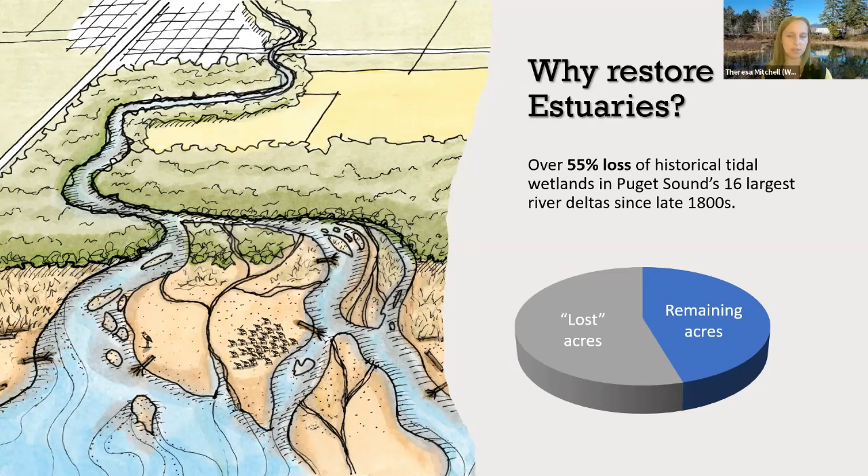And what habitat do they provide? Well, these places where saltwater and freshwater meet provide habitat for fish, birds, shellfish, and wildlife. They contain a lot of important nutrients that support those fish and wildlife and the food web in general. They're a great place for naturally filtering out water pollutants to increase water quality.

And they actually provide a good benefit for extreme events such as those king tides that we see, and also some resiliency to climate change. The vegetation that grows in these estuaries does that naturally for us.

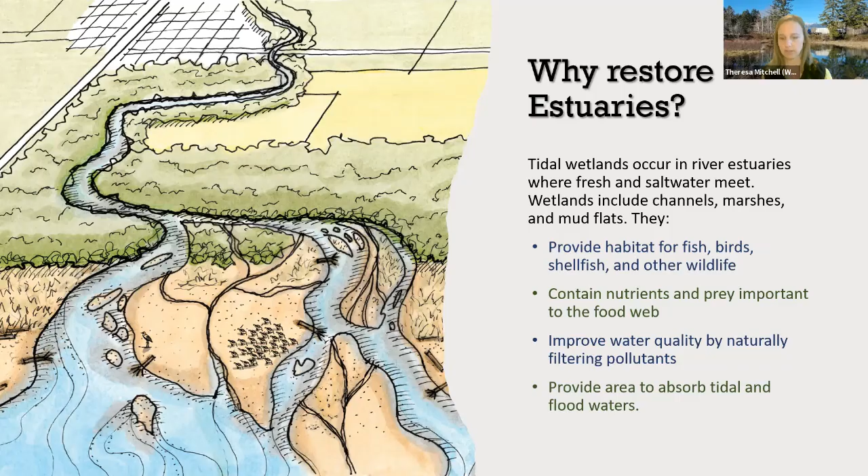So when I look at the Duckabush Estuary, and I apologize, I assume that you all know where it is, but I should probably step back and just say we're on the west side of Hood Canal, part way up, just south of Brinnon. So if that helps you all, apologies for not putting that in.

When I look at the Duckabush Estuary, I see opportunity for improvement. This isn't a Puyallup estuary. This isn't a Duwamish estuary. This is the Duckabush, and it's not used by other land use needs like agriculture or a port or something like that. It really is pretty much in its original condition, with the exception of the highway that has been built across the estuary.

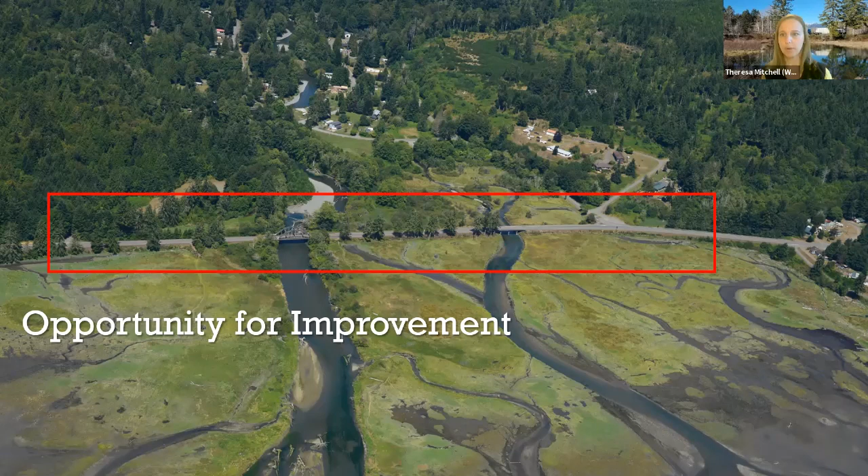So I've highlighted that here in red in case you couldn't see it. That's US 101, and it has 2 openings across the estuary to allow the river to come out. The project would address the highway and other features associated with the highway that have disconnected the river channels and altered the water and sediment movement within the estuary, that therefore has changed the way the habitat has developed here.

And I've put some yellow circles to show we've got some bridges that are locking the river in place. We've also got several places indicated by the blue lines that show where channels have been completely disconnected by the installation of the highway. So that water and sediment is no longer flowing through the highway in those locations, or they've been put into culverts so small that they've significantly altered the way that water and sediment can move through the estuary.

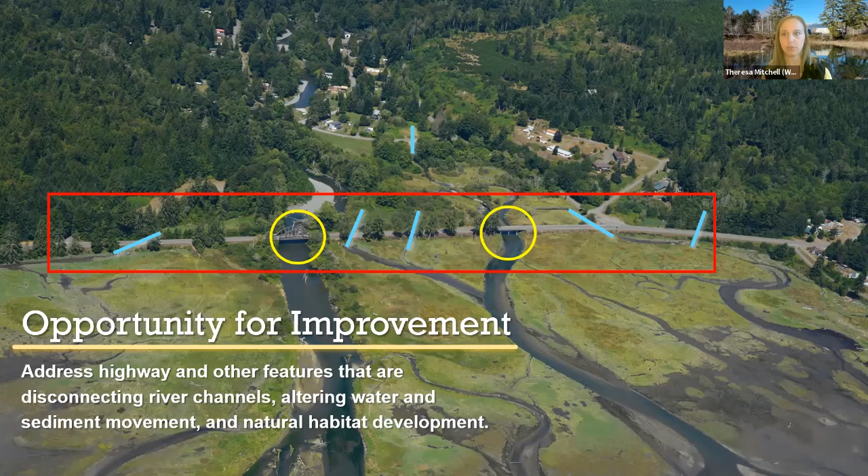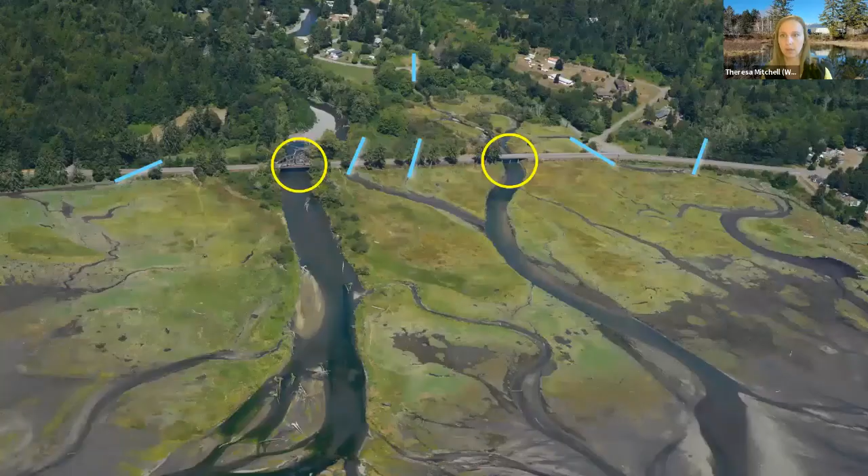We also have some plans from the Department of Highways circa 1931 when they were about to install what is the current US 101 alignment. So the US 101 alignment is this line here. The old road that we can see in the historical photo is this alignment back here. And this gives a very detailed understanding of what the channels and the connectivity used to look like in the estuary before all of the fill and US 101 was installed.

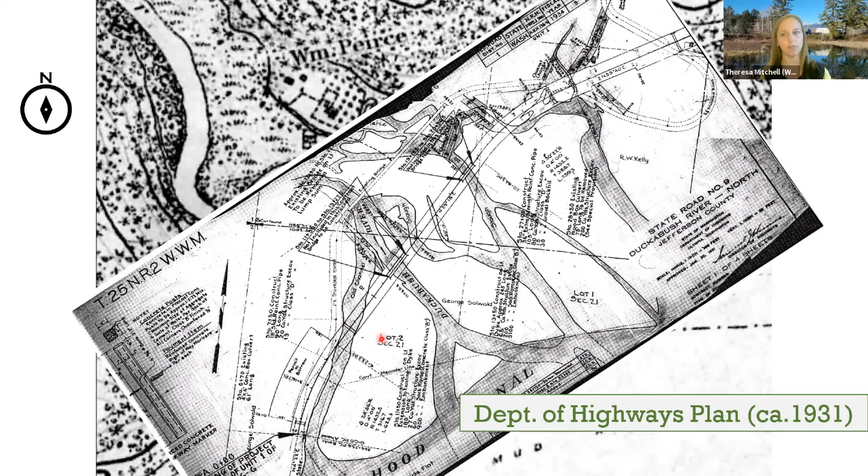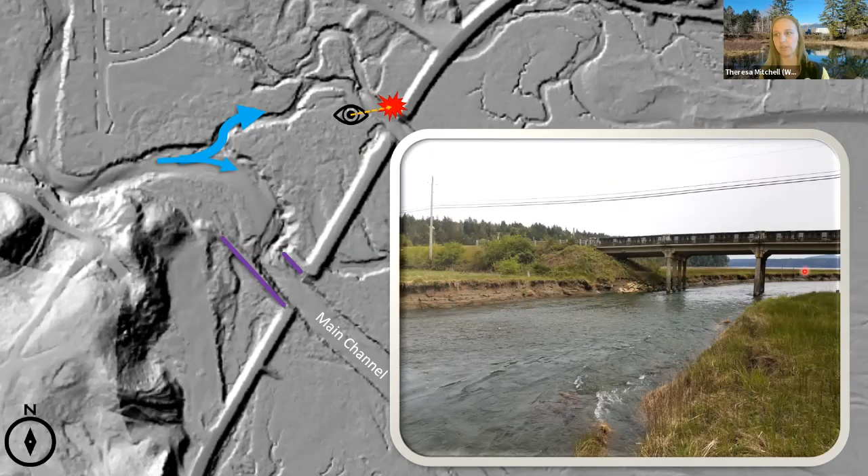As we've analyzed this site over the last several years, we've noticed a few things. The first is that the North Channel is actually taking on more of the flow than the South Channel. And so I think you can very quickly see where this is going, is that with increased flow and under higher velocities, we're seeing that north bank of the North Channel starting to erode more. And this is that sackcrete protection underneath the flat bridge. It's slumping in. You can see active erosion occurring on this bank of the North Channel.

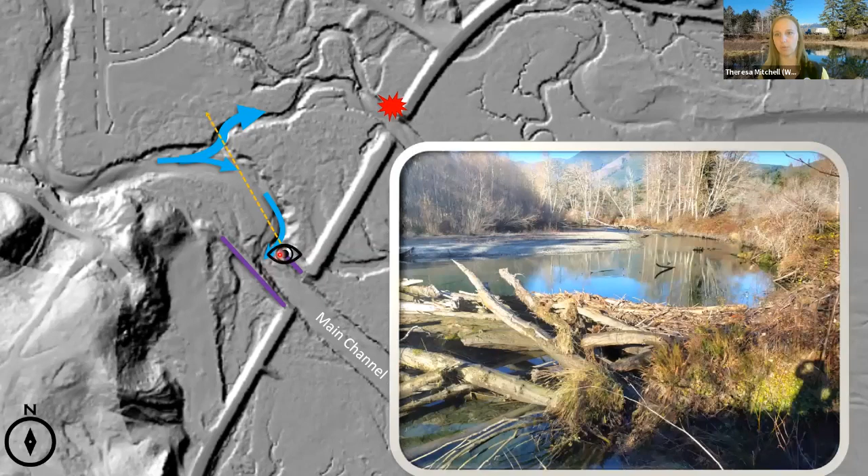Another thing we've noticed is that as the river is coming along here, it's taking a hard turn. It's hitting the end of this training berm, and it's having to take a turn, and it's pointing it into the other training berm. So if we take a look at some pictures, this is me standing on the end of that north berm, just looking up where the orange line goes, and you can see the river is actually off to the right. It's on the other side of the berm where we maybe don't want it to go in the long term. And then from the same kind of vantage point, looking over to the other levee, we are seeing levee erosion of that levee.

So there are several things that we've observed as we're preparing for this project that make us realize that if this project isn't done, at some point in the future, there may be some problems that 101 experiences that WSDOT will have to address. I don't think any of these right now are current problems, but I think it's a sign of what could come if nothing happens at this particular location.

So after all of that, the question is, so how do you fix this? How do you restore the estuary and better the habitat and improve the conditions for the fish and wildlife? So this is our preliminary schematic of what that looks like. And I'm sure you can read the legend and kind of follow along, but I'll point things out so you don't have to do that. The orange lined area is existing 101, and the red are the existing 101 bridges. All of that structure would come out. We would remove the fill, the roadway, everything.

We would have to build a new highway, which is shown by the light gray. That's a new 1,600-foot elevated structure across the entirety of the estuary. And the main reason for doing this, if this were strictly habitat restoration, we would take out the existing road, restore the habitat, and it would be a great project for habitat. But we are savvy enough to know that you cannot disconnect 101 at the Duckabush Estuary. It has to be maintained. This is a very important transportation corridor for the Olympic Peninsula, for the state as a whole, and it must be maintained. So the project includes moving and elevating 101 onto an estuary spanning bridge.

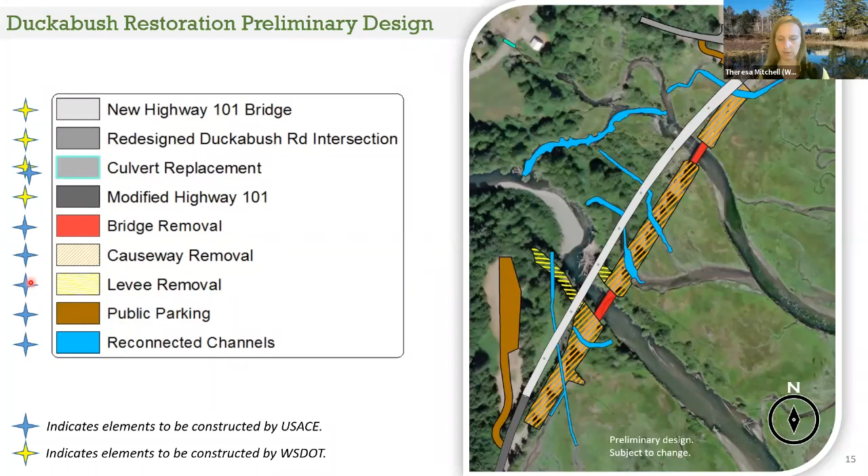Project benefits, going back to why we're doing this: we're improving the habitat for fish and wildlife. That's our primary objective, to restore the lost tidally influenced wetland areas. We improve water quality in a variety of ways, and reduce backwater flooding caused by the highway that's currently built on fill. When there's a flooding event, it's basically like a bathtub with two small drains. This project will remove that bathtub effect and allow floodwaters to pass out quicker.

This road was built in 1934. This project would become a modernized highway design meeting all current safety standards for roads—sight distances, earthquake standards—everything WSDOT is required to address when putting in a new highway.

Moving on to the highway piece. This is a slide from Bill Elliott at WSDOT showing the main components: they will build a new bridge across the estuary, outlined here in blue. The bridge will need new approaches, and because the new highway is slightly offset from the existing alignment, the approaches will have to start offsetting from existing 101.

You can see the project limits marked in pink. We've got approaches on both ends, with culverts addressed in those approaches. Duckabush Road, which currently comes in right about here, will need to shift over to give proper sight distance and safety as it connects into the new curvature of US 101.

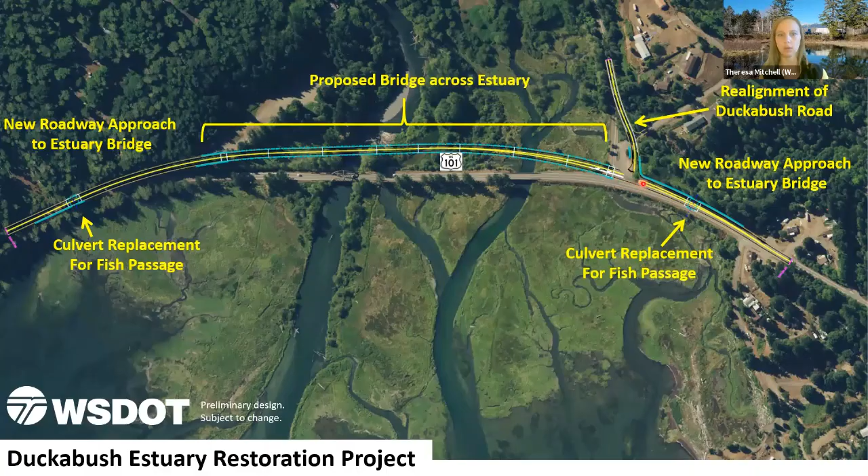We've been lucky to partner with WSDOT's Visual Engineering Resources Group to create 3D imagery of the post-project condition. Keep in mind this is still early-level design—we're at about 30% design, so the final might look a little different—but this gives a general sense. You can see the elevated structure across the estuary.

You can see the shifted Duckabush Road here, with a culvert here and another off-screen, plus another culvert up here. This profile view at the bottom shows that this is no longer on fill—it's fully elevated over the estuary, and the water and sediment will be able to go wherever they choose.

This image shows the lane structure: 12-foot lanes with 5-foot shoulders, an improvement over existing conditions. Both bridges currently on 101 have no shoulders to accommodate bikes and only a very narrow walkway on some sides for pedestrians. This design will be uniform across the entire estuary.

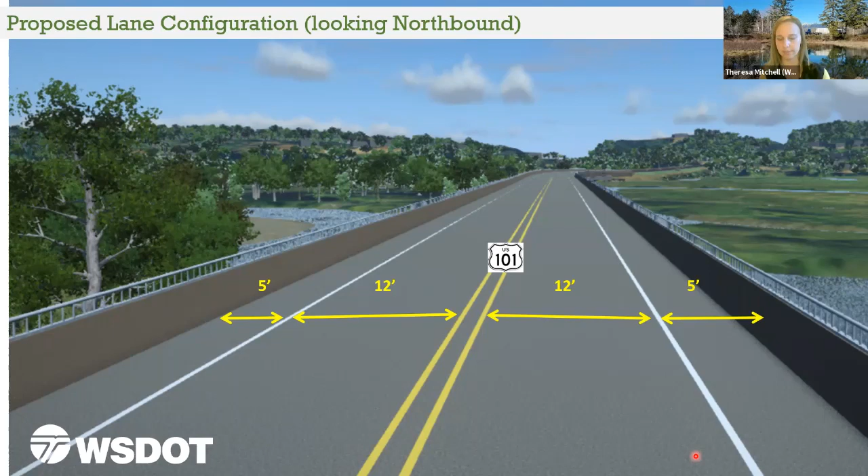This image compares the old elevation versus the new. The new structure will be slightly higher than the existing one, but not considerably—I was initially worried we'd have a giant structure in the estuary, but that's definitely not the case.

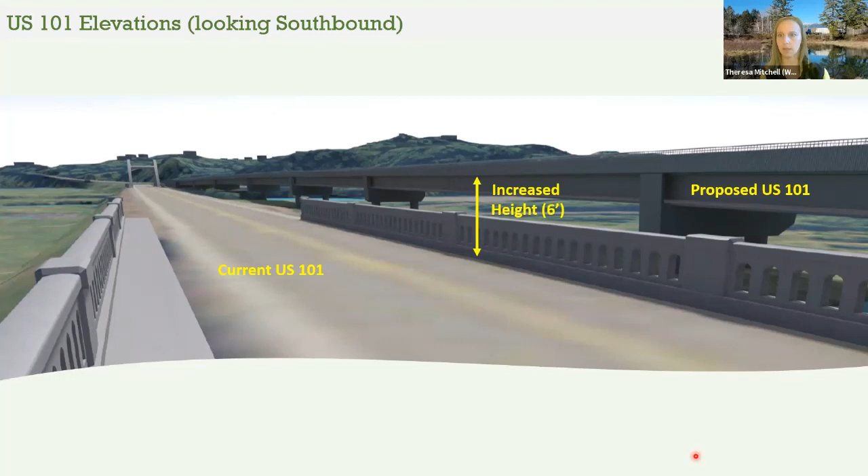One great feature the community valued, which we learned through public meetings, is incorporating a left turn lane from northbound 101 onto County Duckabush Road—you can see that visualization here. With Duckabush Road shifting over, we'll also be able to create a parking lot out of the current Duckabush Road area.

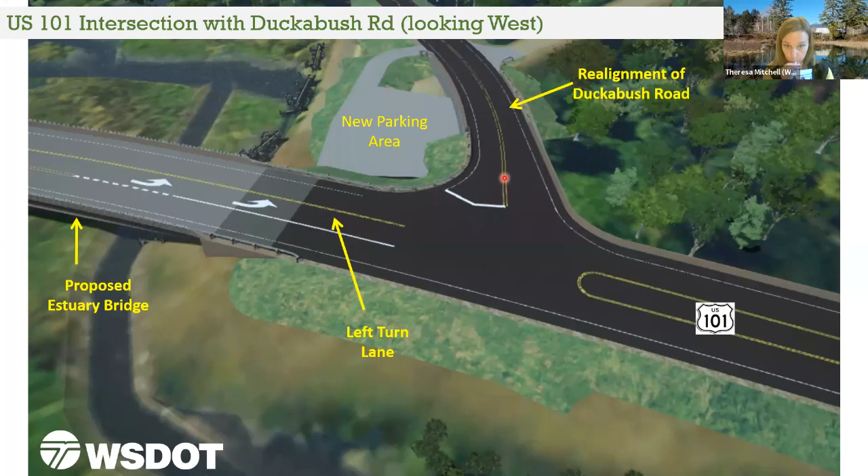This is that same intersection, showing that because US 101 will be higher, Duckabush Road will need to become higher to meet with it—increased about 8 feet up in the air at the intersection point.

Sorry guys, too much talking, not enough water.

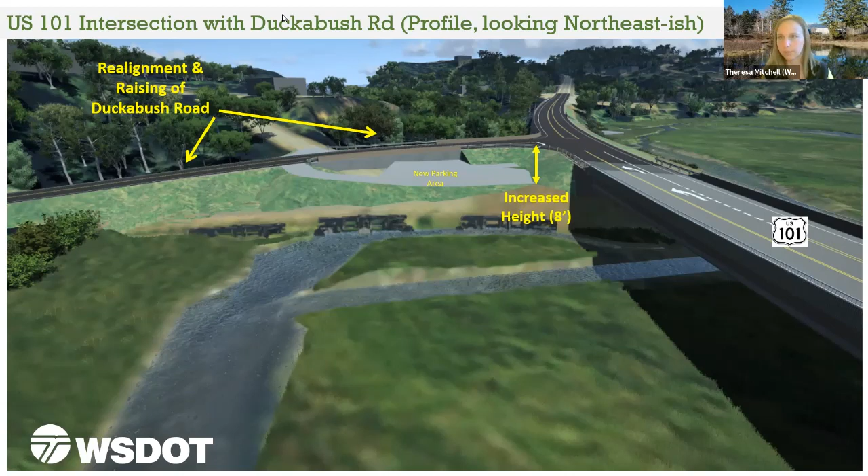All right, I'm going to try and push through this and not cough too much in your ear.

US 101 is super important and cannot be taken offline. It must maintain traffic flow throughout construction. That is one of our planning constraints.

The contractor will use a work area between the existing 101 and the new 101, where they will stage their machinery and build the new bridge. US 101 will remain open throughout that portion of the work.

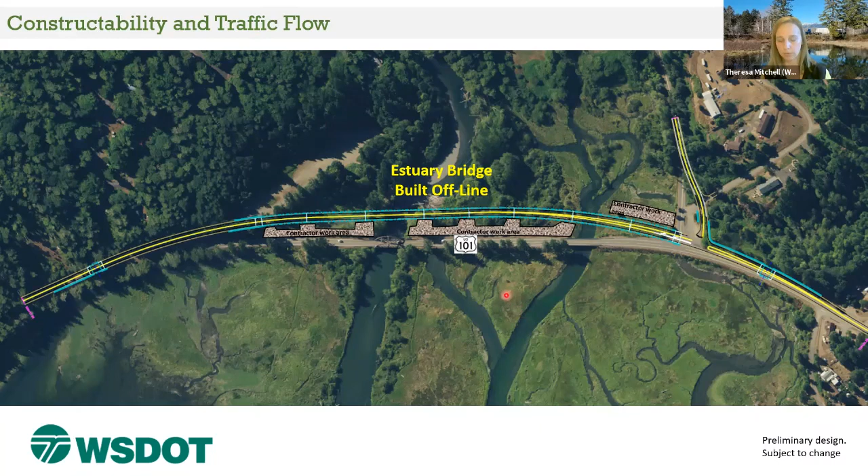There will also be the roadway approaches we discussed. For a period of time there will be alternating one-way traffic with temporary signal control to accommodate this amount of work.

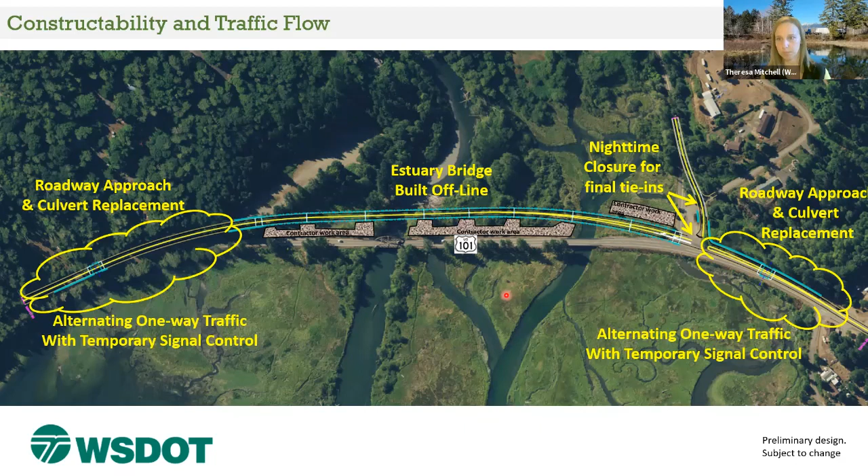Lastly, there will be, I think, two nighttime closures for final tie-ins, but I'll have to defer to WashDOT on the details. We have carefully planned this project to reduce the amount of impact to transportation as best as we could.

This is what it will look like once the new 101 bridge is finished. The old one will still be in place until it is removed. So this is a good overview of what the condition will look like for a while, until removal of the existing highway begins.

As I mentioned earlier in the presentation, this project benefits habitat. Two of the species that will benefit from this improved habitat are Endangered Species Act listed salmonids: Hood Canal summer chum and mid-Hood Canal chinook.

These fish are very dependent on the estuary for a portion of their life cycle. Things like water temperature, salinity, the size, shape, and volume, the complexity of the habitat, and the availability of prey are really important to them in an estuary.

The reason for that is pretty simple. These fish come out of the rivers really small and transition from freshwater to saltwater. They need a place to stop, get bigger, and make that physiological transition so they can survive in the new saltwater conditions, which are not like what they were born into in the freshwater.

So the more habitat, the better habitat, the more suitable it is for them to rest, eat, and hide from predators, the more it allows them to get bigger and stronger and transition into saltwater with a higher likelihood of surviving and returning to the river to spawn. Estuaries are very important for fish, especially these ESA listed species.

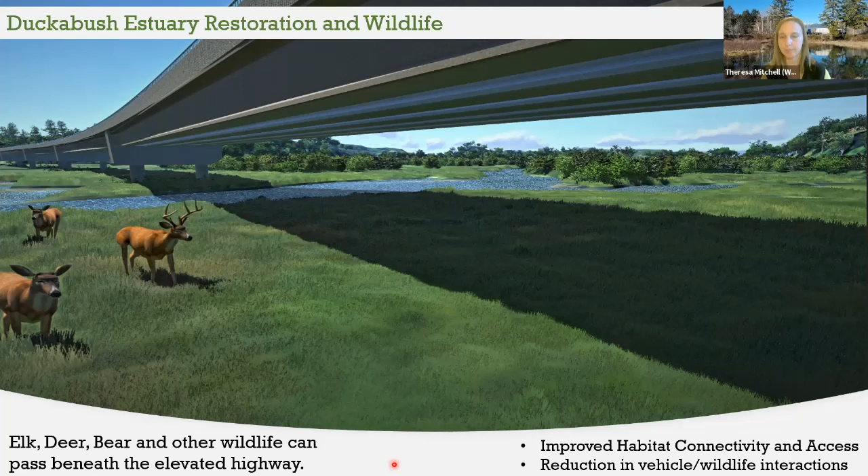Okay, I'm going to roll into schedule and funding really quickly here. I'm checking the time, it's tight.

The design phase is approximately 3 years. We are here in the black bubble. We expect about a year more of design and to be completed before the turn of the calendar year to 2023. We have full funding in hand to complete design and are pushing forward to get that work done.

There will be a period in which we need to secure funding to proceed with construction, and then the construction phase would be about 3 to 4 years in duration. We don't know yet when that will start—it will depend on when funding is secured and all the lands for the project are secured.

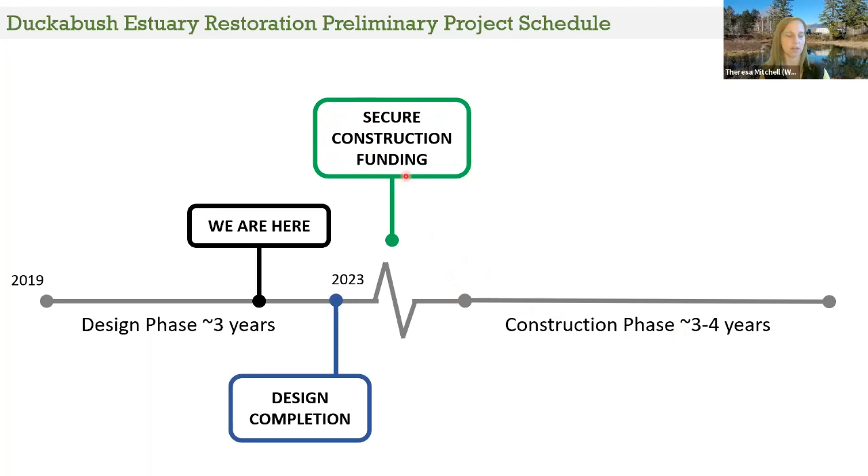As I said earlier in the presentation, this is a cost share with the Army Corps of Engineers. When we partner with them under their Aquatic Ecosystem Restoration Program, they will be able to put about 40% of the funding into the project. There are certain project elements that the Corps doesn't cost share.

In this particular project, the new 101 bridge is one of those elements that their policies do not allow them to cost share. So it puts a little bit more of the cost on the state side, which is indicated by the green.

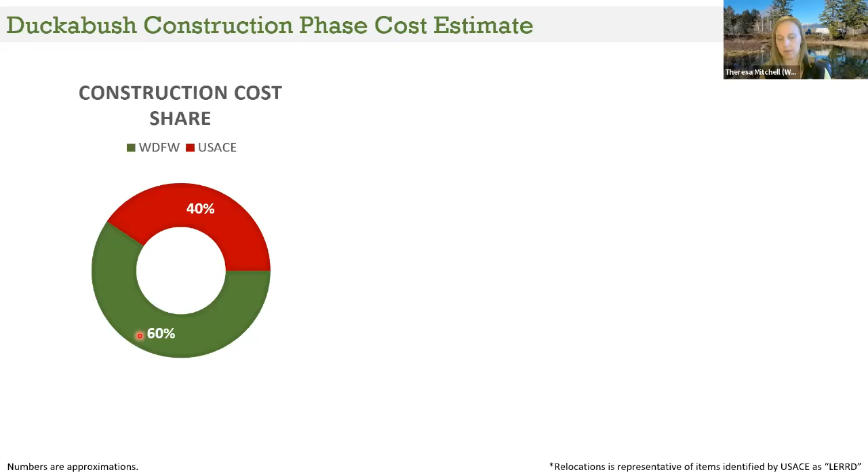So that's roughly the breakout of how the federal versus the non-federal funding works. And when I say non-federal, it's up to DFW to get that 60% of funding. When we break that out, DFW has about a $50 million need to complete this project, and about 93% of that $50 million is the new highway and bridge. So that is our current problem statement that we are actively working.

We have a state capital supplemental budget request this year for that $50 million to complete this project. And on the federal side, the feds are also requesting their funding for the project, either through the infrastructure bill or their annual work planning process, whichever happens to materialize first.

So I guess this is really my last slide. My takeaway for this group is we need all the help we can get to fund the state portion, the $50 million ask for the construction phase of this project. It is a very large ask for a capital budget. You'll notice I say capital, not transportation. This is not a WashDOT project. It is not in their work plan. It's not a chronic environmental deficiency. This is an ecosystem restoration project, and it is being put forward by DFW into the capital budget.

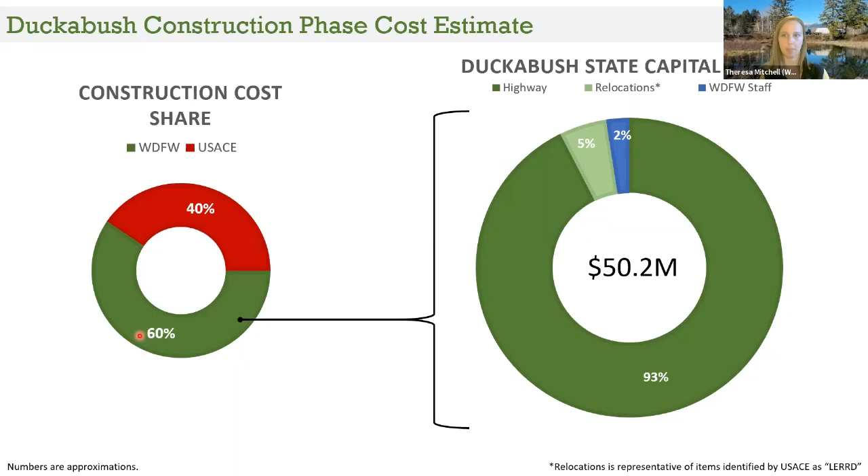So just to summarize that, cost sharing it, federal responsibility is about 30 million, state about 50 million. And we're looking at the capital budget. We would appreciate any help or support we can get to help us get through the supplemental session successfully, and we're open to any ideas or thoughts you have about how to do that. So I will stop talking. I've talked a lot. Please ask questions, and Seth and I are happy to answer them.

Yes, thank you very much, Theresa. It was very informative and very complete. Appreciate your presentation. Lindsey, do you have a question or a comment?

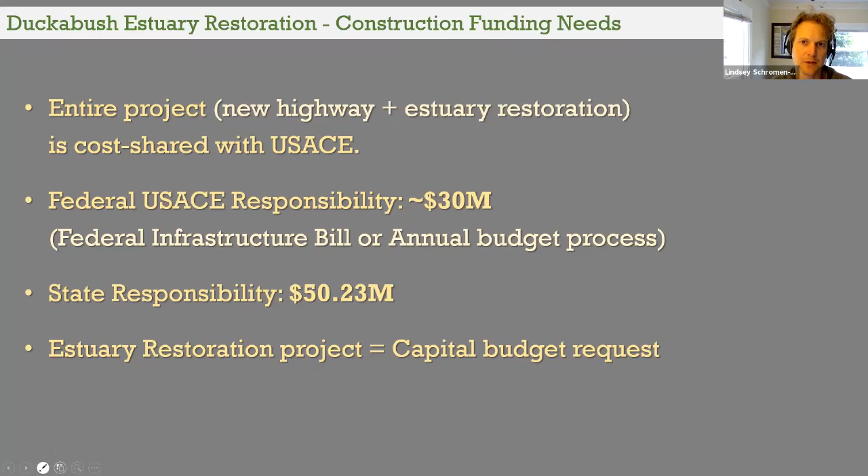Yeah, I had a question about those channels. It looks like they've been locked in place for about 90 years, and I would assume that they've incised and are probably below the overall height of the estuary floodplain. Is that the case? And if so, are there any parts of the project to try and reconnect them with the estuary floodplain?

So that's a really interesting question. I would say in general, we're not seeing incision of the channels, and that's just because of the amount of sediment coming down the river. Historically, before the highway was put in place, as the river flows and floods, that sediment kind of spreads out and can go wherever. Now it's being confined to the two channels. So we're actually seeing, and the reason why the flow is going more northerly now, is we're seeing a lot of sedimentation and rising of the elevation of the channel.

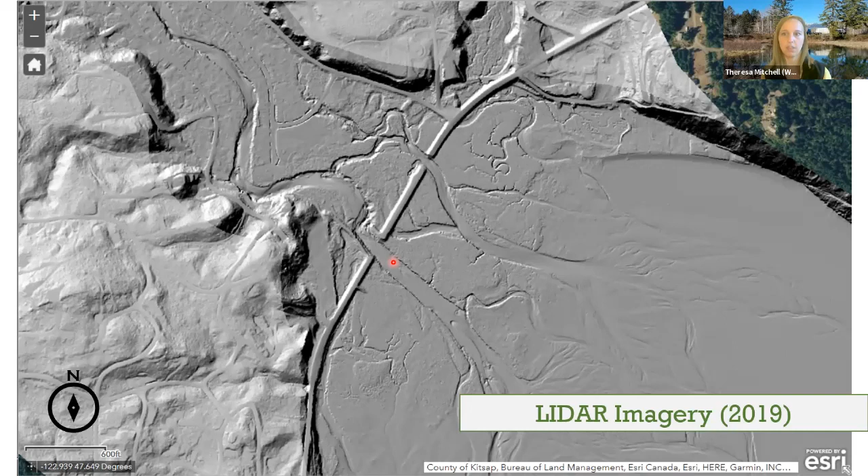So I think it's almost opposite in most places of what I think I heard you say. The channel excavation work that is happening, let me see if I can get to a slide that might show that a little better. This image, you can't see it because of the tidal elevation we projected, but there is a channel here. Let me switch to pen. So we're connecting this channel here, this channel here, this channel here, and this channel here.

There was an idea to also connect this, but through our evaluation over the last couple of years, we realized that north channel connector is doing fine on its own, so that will not be part of the project anymore. So to answer your question more concisely, most of the excavation will be just through these areas where the existing 101 is, making sure we're connected, and keeping our footprint out of the estuary as much as possible, not really getting out there and digging anything to any specific elevation beyond what we're doing in the 101 footprint. Thanks.

Are there any other questions? Raise your hand or speak. Anne, oh, please. Is there any opportunity with residual funding, I know that's a funny word, to support fishermen or other local population at the base of the bridge for access at this point to fishing, for example?

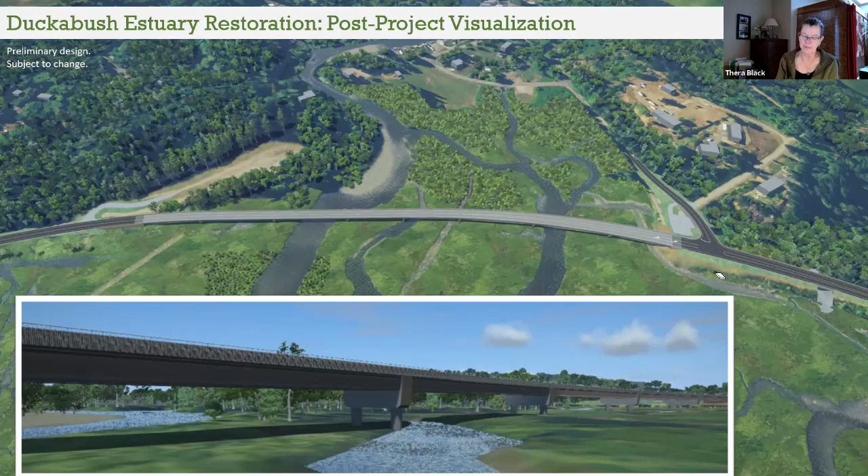Yeah, earlier in the meeting, we talked just real briefly about resilience. And so this is for Theresa. One of my thoughts was that on your slide about the project benefits, if you could fit another bullet: you could clearly see through the work that you all have done that in time, this was going to erode 101. And by elevating it and removing that, I think resilience is definitely a function of this, increasing the resilience of the 101 corridor.

And with the emphasis, like Secretary Buttigieg just released within the last few days, the climate action plan for US DOT. And I know that capital funding is more than just transportation, but certainly on the transportation side, resilience is a huge emphasis of the funding that's going to be released soon. And then just to the policymakers, this is a great example of how fixing a problem like this, the estuary problem, actually has long-term benefit for 101 and the resilience of that corridor. So these are small little ways that we'll start thinking about resilience differently in the future. So I just wanted to bring that up.